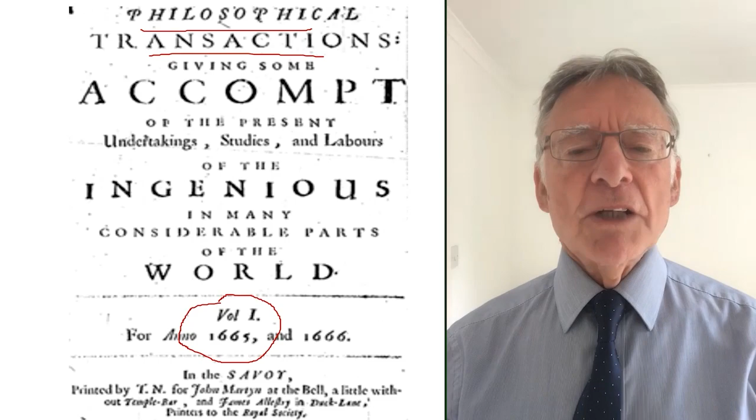Griffith's famous paper was printed in January 1921 in Phil Trans, originally being presented in October 1920. In it, Griffith produced his famous equation from the conservation of energy principle, which seemed crazy at that time. He showed that the stress at crack equilibrium, sigma, went down predictably as the crack length c went up. And this required the new idea of toughness, W, the fracture surface energy, which is the energy needed to separate atoms against the atomic attractions as the crack proceeds.

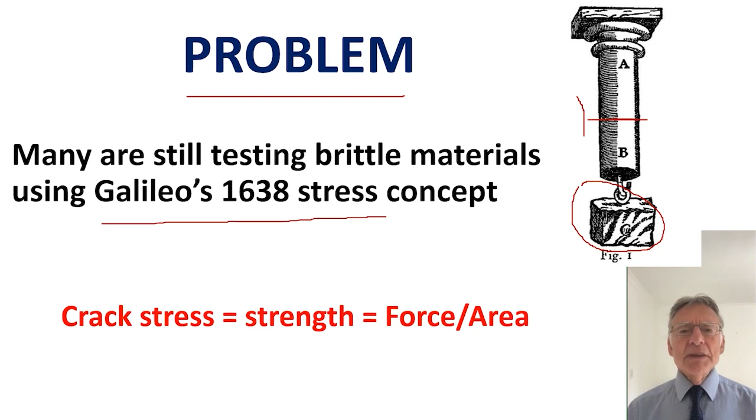Now the problem is that millions of engineers still use the old Galilean pressure theory of strength. What Galileo did was test a ceramic sample, applying a force with this weight and causing a crack here. He postulated that stress, this force divided by cross-section area, dictated cracking.

Today, we want to get it right once and for all. First, we want to celebrate Griffith's contribution. Then we want to present new results and theories like graphene reinforcing cement. And finally, we must reject the errors in fracture mechanics. It's a subject riddled with defects.

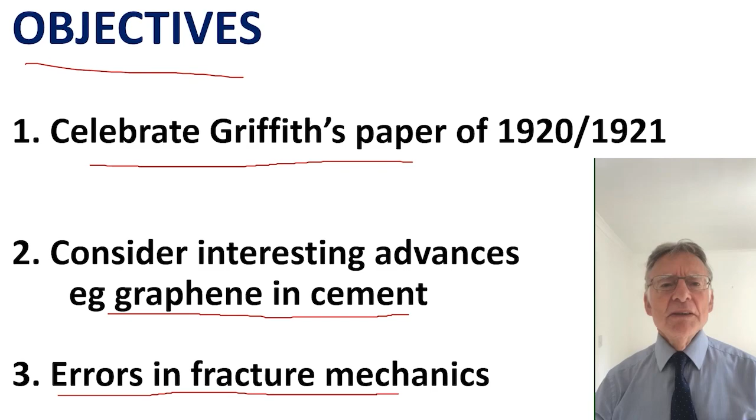The first speaker is Ange-Therese Akono from the United States to talk about graphene toughening cement. Siva Bohm has worked for many years on the manufacture of graphene. He takes a block of graphite and splits it into billions of atomic layers. Graphene is made by a cracking process.

Finally, Irene Fernandez-Villegas reports interesting results on welded thermoplastic composite sheets for aircraft. These sheets could crack along the weld to cause a disaster. A new approach to this problem is urgently needed because the ASTM standard does not mention Griffith.

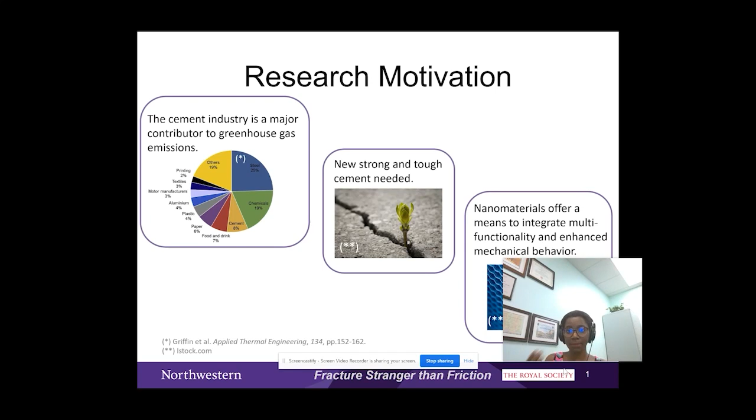There's a wide range of nanomaterials, and today I'm going to focus on 4 types of carbon-based nanomaterials: graphene nanoplatelets, helical carbon nanotubes, multi-wall carbon nanotubes, and carbon nanofibers.

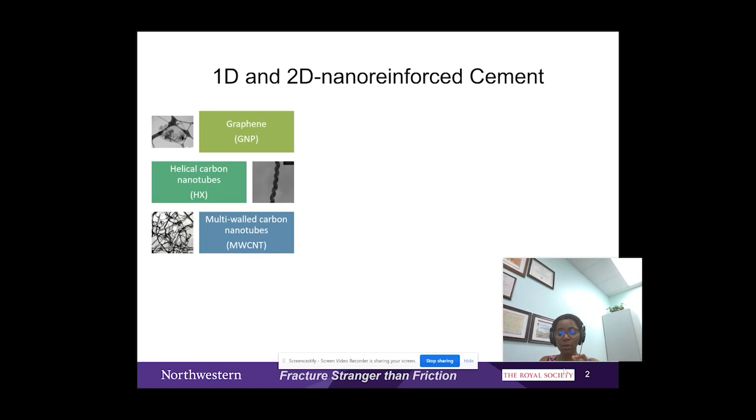In terms of dimension, the thickness of the graphene nanoplatelets is 8 to 15 nanometers. The diameter of the helical carbon nanotubes and multi-wall carbon nanotubes is 20 to 50 nanometers. The diameter of the carbon nanofibers is 150 nanometers.

In terms of length, the dimension of the graphene nanoplatelets is 1 to 2 microns. The length of the multi-wall carbon nanotubes and helical carbon nanotubes is around 50 micrometers, and the length of the carbon nanofibers is between 50 to 200 micrometers.

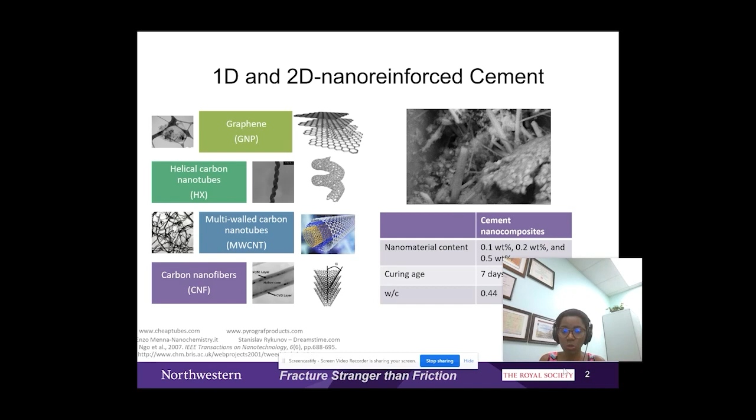Despite a lot of studies on this topic, some open questions involve the influence of carbon-based nanomaterials on the microstructure of cement and on the mechanical properties. In this talk, I'm going to use fracture toughness as a criterion to evaluate the mechanical performance of cement nanocomposites.

I will look at 3 types of reinforcement levels: 0.1%, 0.2%, and 0.5%. 0.1% and below has been extensively studied because it is easier to disperse nanomaterials at that level. 0.2% and 0.5% are interesting when we want to design sensors for structural health monitoring, for instance, but they are challenging in terms of synthesis, and I'm going to be tackling this.

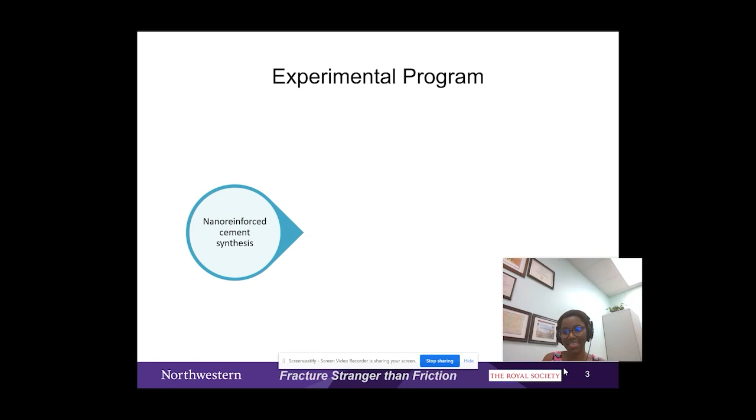In terms of experimental program, first I'm going to show how I actually yield my cement nanocomposites. Then I'm going to probe the microstructure and the mechanical properties. And finally, I'm going to conclude.

When it comes to synthesis, the important question is how do we achieve a uniform dispersion of the nanomaterials? How are we able to make sure that they don't become clustered within cement matrices? For this, I use a series of steps.

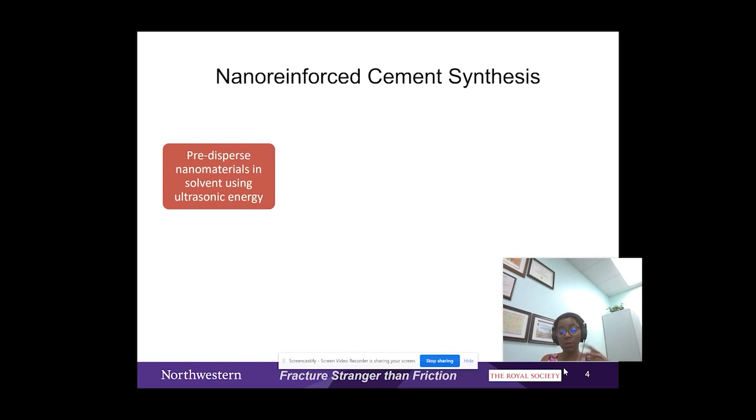First, I predisperse the nanomaterials using deionized water and ultrasonic energy. Then I mix that suspension using high speed and high shear, combining it with cement powder. Afterward, I cast it and use mechanical stirring during the first 24 hours with an orbital shaker, and then I cure for 6 days using deionized water.

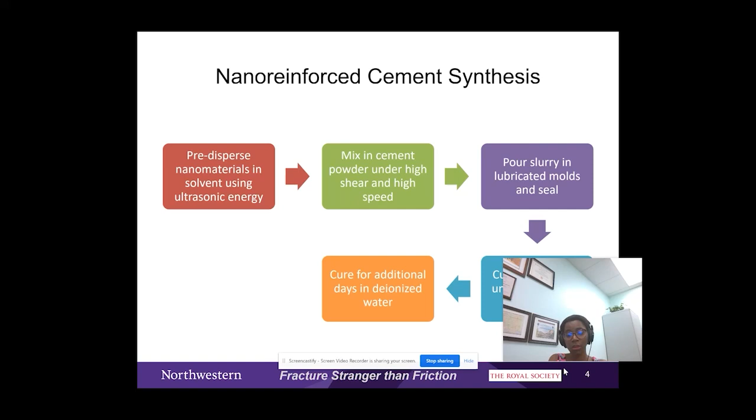Let's look at an example with carbon nanofiber reinforced cement. First I weigh the carbon nanofibers and the deionized water. Then I use ultrasonic energy to predisperse the carbon nanofiber. Now, that dispersion is not optimal.

This is why in the second step, I use high speed and high shear with cement powders. This time the unhydrated cement grains help me further disperse the carbon nanofibers. After pouring the slurry, I use an orbital shaker, and with mechanical stirring I keep breaking any potential clusters of carbon nanofibers so I obtain a uniform and well-mixed carbon nanofiber cement composite.

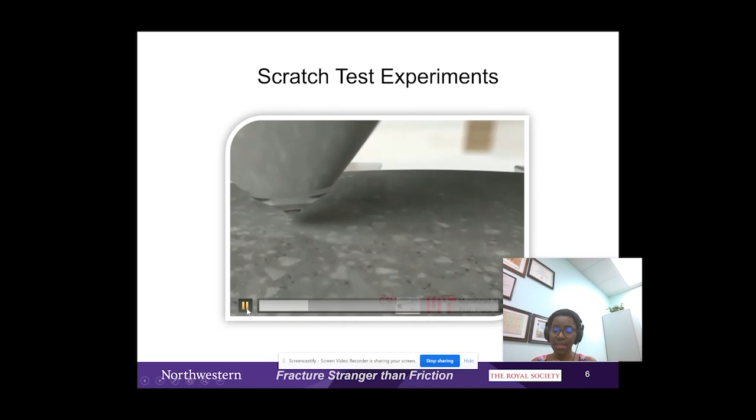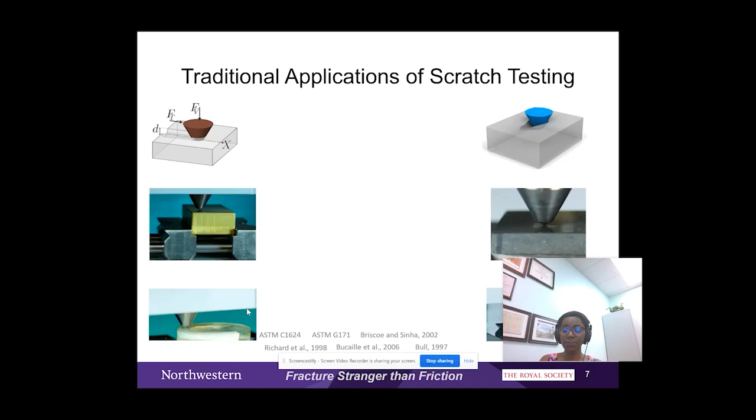I test the mechanical behavior using scratch test experiments. I use a Rockwell tip, a spheroconical probe, and I prescribe the vertical force while recording the horizontal force and penetration depth. Traditional applications of scratch testing include adhesion and cohesion of thin films and coatings, strength and hardness of ceramics, strength of rocks, wear of polymers, and damage of metals.

What I did was design a nonlinear fracture mechanics model to relate the forces to the geometry and to the fracture toughness in scratch testing. The final equation is given here, relating the horizontal force to the geometry and to the fracture toughness during scratch testing.

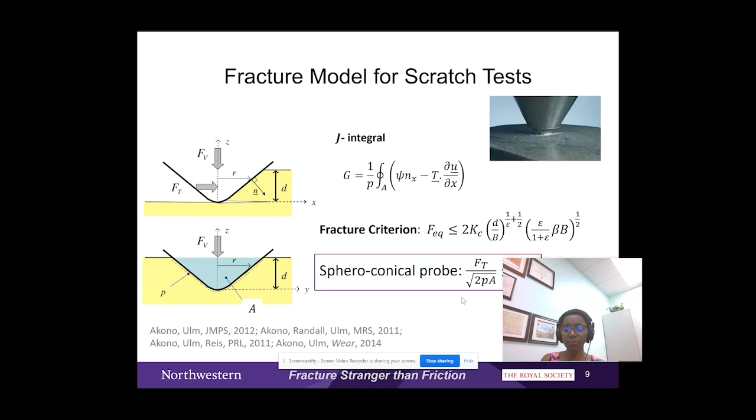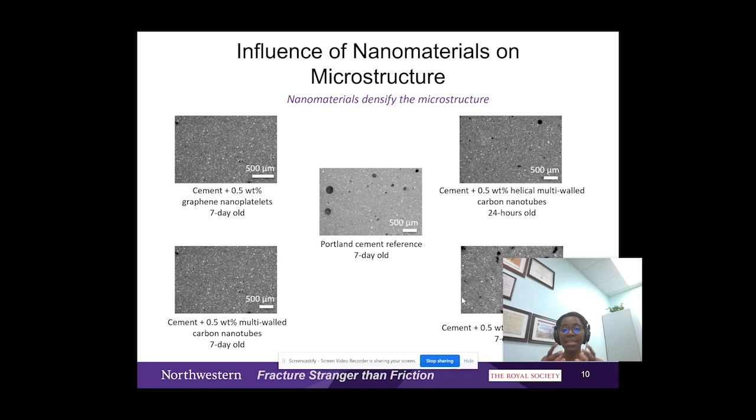So then I have a methodology, and let's look at the results. The first question I ask is how nanomaterials influence the microstructure when we have graphene nanoplatelet cement, helical multiwall carbon nanotube reinforcing cement, multiwall carbon nanotube, or carbon nanofibers. Overall, I observed a reduction in the microporosity, both in quantity and size of the pores, meaning nanomaterials tend to densify the microstructure of cement matrices.

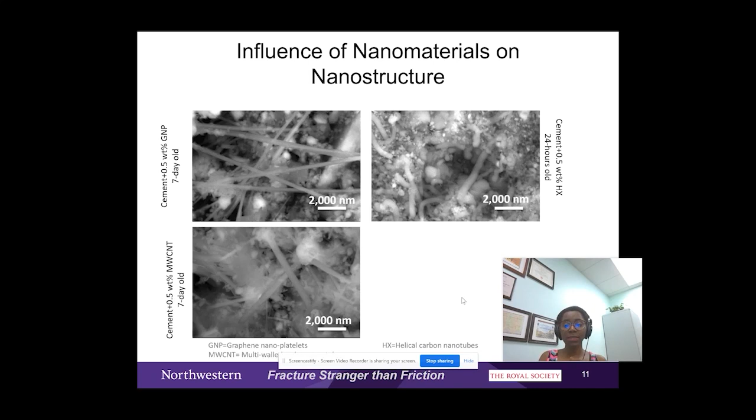Then I use high-resolution scanning electron microscopy to understand how nanomaterials interact with cement hydration products. I looked at graphene cement, helical carbon nanotube cement, multiwall carbon nanotube cement, and carbon nanofiber cement. What I saw is that nanomaterials tend to bridge nanoscale air voids and connect cement hydration products.

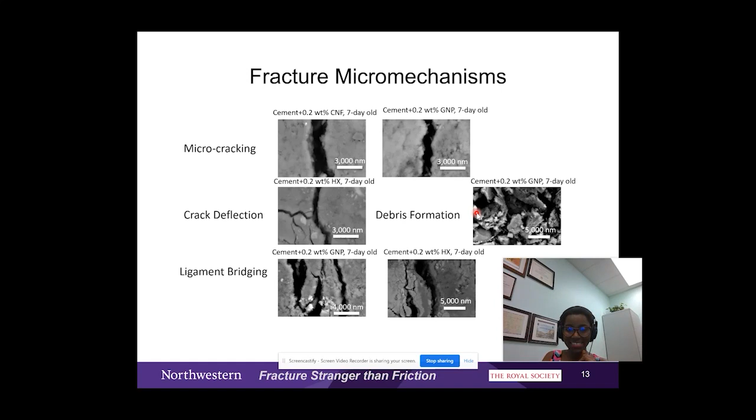I identified four types of fracture micromechanisms: microcracking, crack deflection, ligament bridging, and debris formation. We can even see the thickness, or width, of the crack during fracture, and it is between 1,000 to 2,000 nanometers.

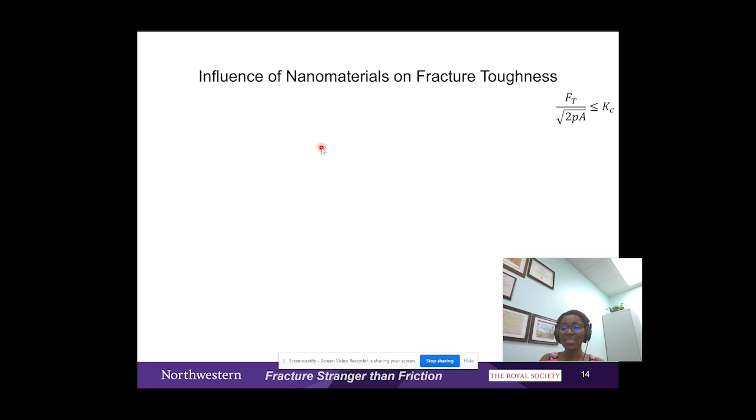Then I use my model to assess the influence of nanomaterials on the fracture toughness. According to my model, this quantity should be constant. What I saw is that for very low values of penetration depth, there's actually a mix of both ductile and brittle deformation taking place. However, at very large penetration depths, brittle failure becomes dominant, and in that range we can then measure the fracture toughness.

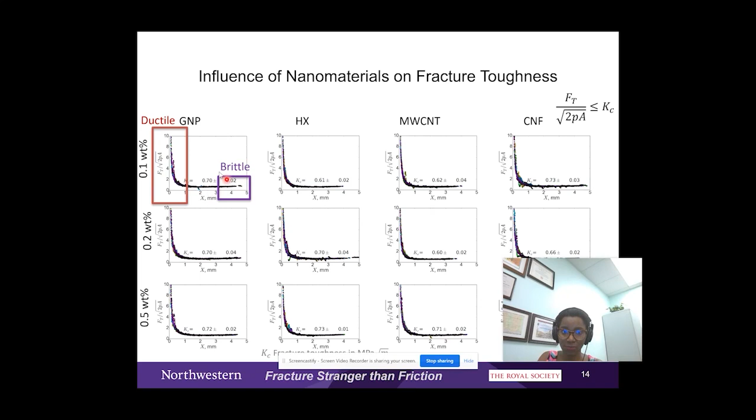Then I try to see the influence of both the type of nanomaterial and their volume fraction on the fracture toughness. For graphene nanoplatelets, I observe always an improvement in the fracture properties, in the fracture toughness, when we add graphene nanoplatelets. Similarly, for carbon nanofibers, there's always an improvement. However, in the case of helical carbon nanotube and multiwall carbon nanotube, there are some volume fractions where we observe a slight decrease, a really small decrease, and that suggests there's some room to optimize our dispersion process.

One thing that is very remarkable is that at 0.5%, for all four types of carbon-based nanomaterial, we have a 10% increase in the fracture toughness. This means that the procedure I presented is really important and enables us to significantly improve the fracture toughness of cement nanocomposites.

In conclusion, I've shown that nanomaterials yield a decrease in the microporosity and in the size of micropores within Portland cement. I've shown that nanomaterials bridge nanoscale air voids. I've shown that scratch tests can be used to probe the fracture toughness of Portland cement. And in the case of cement reinforced with 0.5% of nanomaterials, we see an improvement in the fracture toughness by up to 10%. Thank you very much.

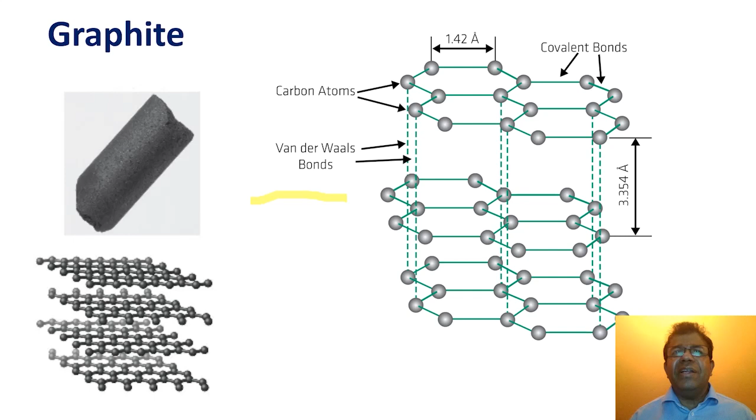The delocalized electrons on a single layer of graphene make it even more conductive. Graphene production from graphite via the top-down route has many unique advantages and is based on the one-step physical transformation of graphite into graphene. However, pristine graphene production has been pursued with difficulties, either in production rate or in the number of layers present in each graphene platelet.

Liquid phase exfoliation from graphite to graphene requires input energy to overcome forces between the layers. This required energy is provided by various means such as sonication, electrochemical energy, mechanical energy, or high pressure, to break existing interlayer interactions.

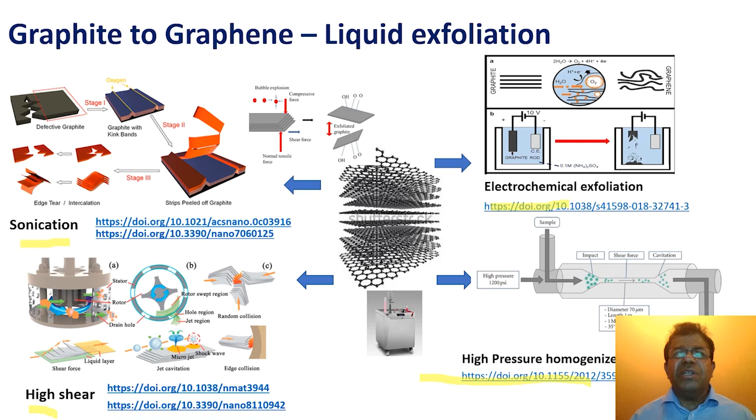Besides, many molecules such as surfactant molecules and polymer compounds are used as exfoliation agents to generate new forces such as pi-pi conjugation, hydrophobic force, and Coulomb attraction, matching the surface energy of the graphene layers to that of the exfoliation media. The underlying scientific principle is similar to Griffith's theory of crack propagation: reduction in potential energy should be greater than or equal to the increased surface energy due to the creation of a new free surface.

The excess energy exerted by the chosen exfoliation technique can also fragment large graphite particles or graphene layers into smaller ones.

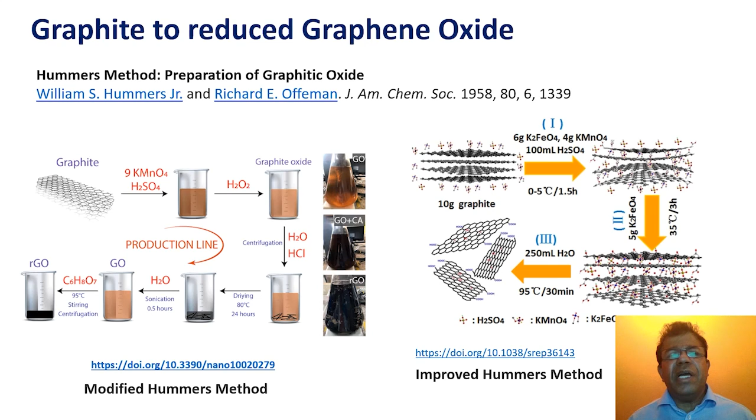Raman spectroscopy is a useful technique for characterizing sp2 and sp3 hybridized carbon atoms, including graphite, graphene, and other carbon allotropes. The 2D band is a second order two-phonon process and exhibits a frequency dependence on the excitation laser energy. The 2D band can be used to determine the number of layers of graphene.

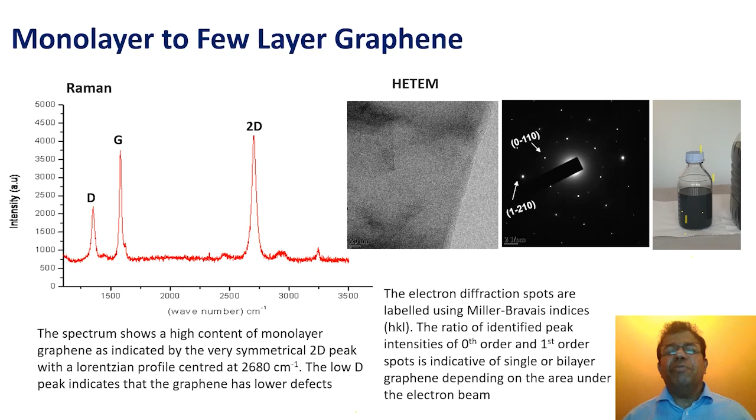Graphene-enhanced lithium-ion batteries show incredible characteristics such as long lifespan, high capacity, faster charging time, and lightness. Fuel cells are considered the 21st century technology for the production of electric energy. This is due to their high efficiency, low emission, safety, and silence. New catalysts can increase the conversion efficiency of fuels, increase durability, and decrease cost.

Anti-corrosion coatings with graphene and reduced graphene oxide nanoplatelets have been evaluated and are promising for protective coatings. Graphene is called the wonder material or ultimate additive for a reason. There is much industrial research which is not yet published, but may change the world tomorrow. Thank you for your attention.

Thanks, Siva. Your exfoliation methods are really fascinating. One question that's come in is from Fyodor Borovich. Carbon nanotubes and graphene are rather inert. He points out that they usually do not create chemical bonds with surrounding materials. How will you resolve this problem?

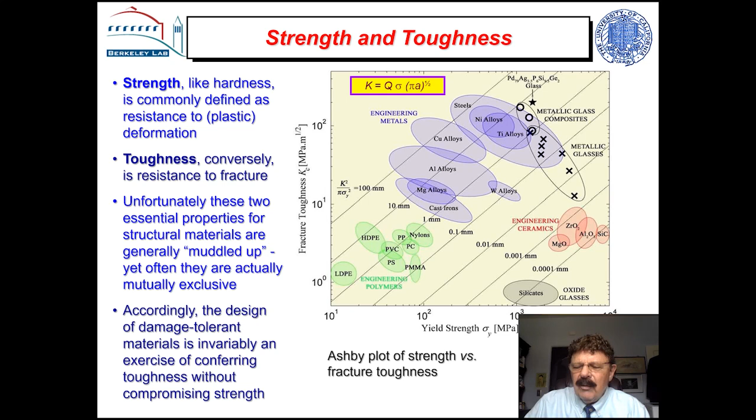Now, why is this? Well, toughness is often a mutual competition itself. Toughness is resistance to damage in the materials, and that's what I call intrinsic toughening. This takes place generally ahead of the crack tip. Damage is in the form of breaking particles, cracking the matrix, causing decohesion, and it's generally resisted by plastic deformation or whatever form of inelastic deformation you have. This is the main source of toughness in metals, and it occurs ahead of the crack tip.

But you can't use that very readily for ceramics. Ceramics tend to be toughened by a totally different mechanism, which involves shielding the crack tip from the applied driving forces. These mechanisms operate at and generally behind the crack tip. They're associated with bridging, say, fibers or grains that would carry load that would otherwise be used to propagate the crack. There's a grain bridging zone in a ceramic, silicon carbide. These mechanisms operate basically at multiple length scales, whereas plasticity is generally generated at the nanoscale.

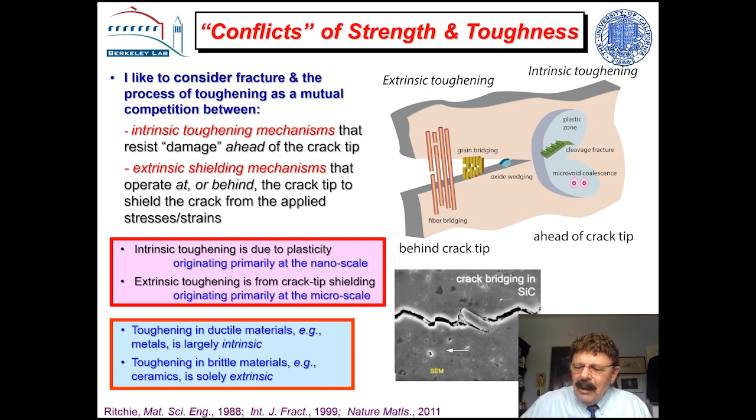So the intrinsic mechanisms occur ahead of the crack tip for ductile materials, and the extrinsic ones behind the crack tip, primarily for brittle materials. But biological materials seem to be able to combine both these mechanisms quite readily, and they do that by having multiple length scales in their microstructures. This is bone. It has characteristic dimensions at the nanoscale, twisted peptide chains, mineralized collagen fibrils, all the way up to the osteonal structure and the bone itself. So if you look at the mechanisms of toughening in bone, they combine both intrinsic and extrinsic.

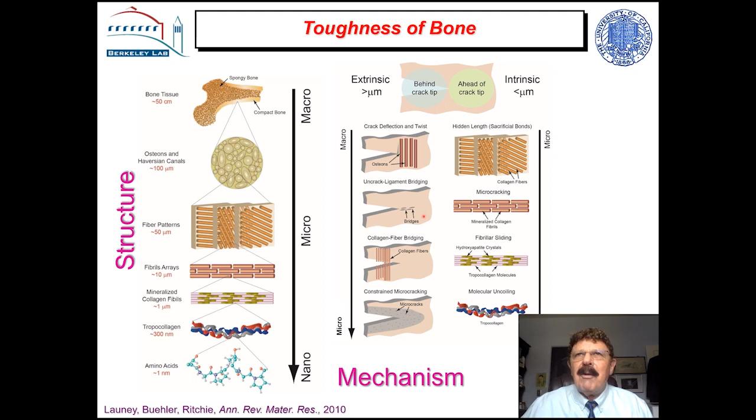At the small scales, for example below a micron, ahead of the crack tip, you see intrinsic toughening from plasticity. Plasticity in bone is generally many mechanisms, but generally it's the stretching of the collagen fibrils and then them sliding apart - that's fibrillar sliding. Anything that inhibits that will tend to inhibit plasticity. If you look above a micron, behind the crack tip, you see all the extrinsic mechanisms that you might see in a ceramic: microcracking, bridging by collagen fibrils, little regions between the microcracks that act as bridges, and deflection at the collagen fibrils. I have a few images of this from tomography.

Now, how does that work? Well, it consists of a tangled mass of collagen. These collagen fibers are very twisted and curved. And what happens when you put a load on skin? These collagen fibrils tend to straighten, and then they tend to rotate to carry more of the load. They get into this sort of aligned situation, much like a polymer might, and then they stretch themselves, they separate and delaminate, and they finally fail. So you start off with a tangled mass of curvy collagen, and you end up with these aligned ones, which are really very effective in absorbing energy.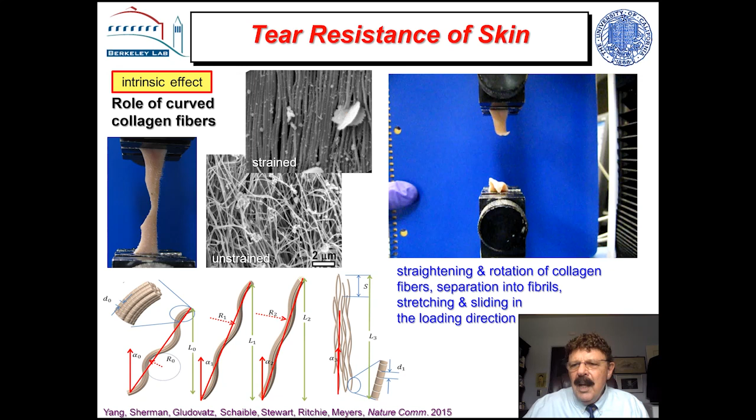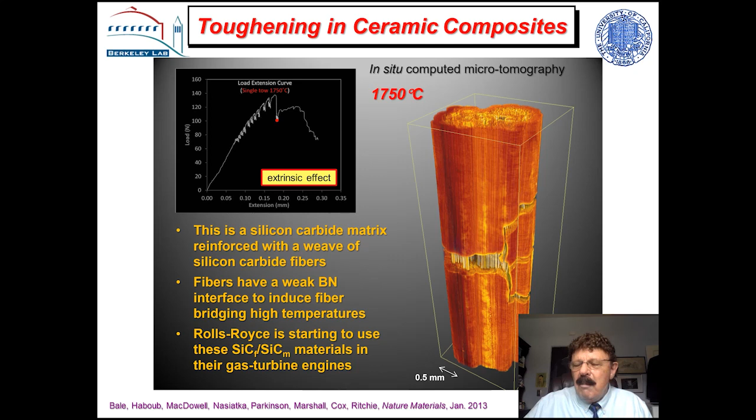These are very important. To enable the crack to be bridged by them, you have to have a weak interface, and they're coated by boron nitride to remain such that they can slide and generate bridging.

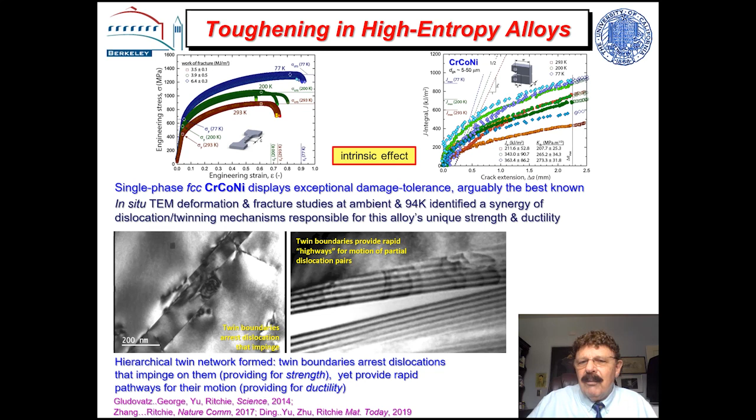Let me conclude by saying I've looked at how metals are toughened intrinsically, how ductile materials are toughened intrinsically. Brittle materials like ceramics are toughened extrinsically. The latter is associated with shielding behind the crack tip primarily, but the intrinsic ones are associated with plasticity ahead of the crack tip. But biological materials have this interesting function that they have multiple length scales. These different mechanisms are formed at different length scales, and so biological materials tend to be able to generate both intrinsic and extrinsic toughness, which gives them their remarkable properties.

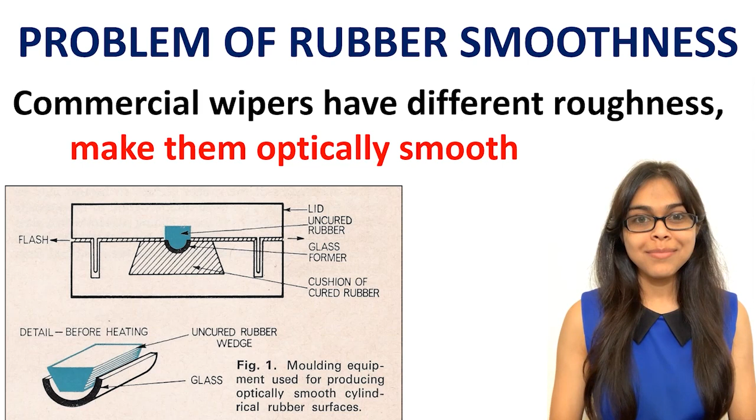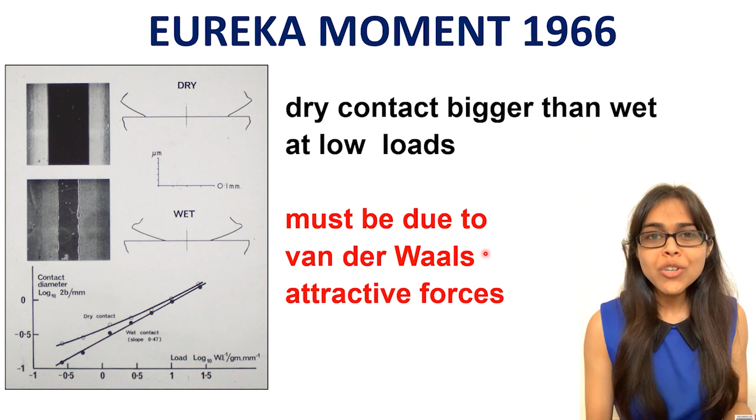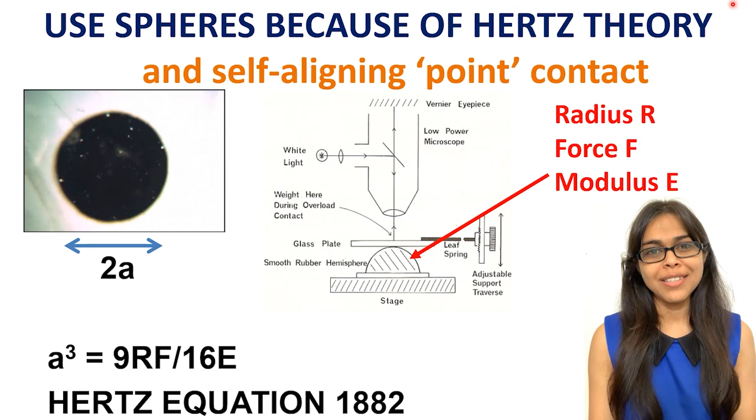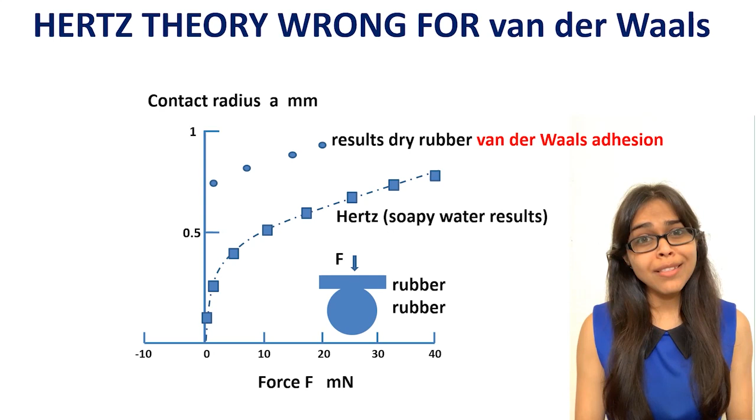Ken Johnson was the brilliant stress analysis engineer who had obtained the stress-field solution much earlier, by adding two well-known stress distributions in 1958. Sadly, he died in 2015, famous for his contact equations and his book on contact mechanics. Without Ken, it would not have been possible to explain this adhesion crack.

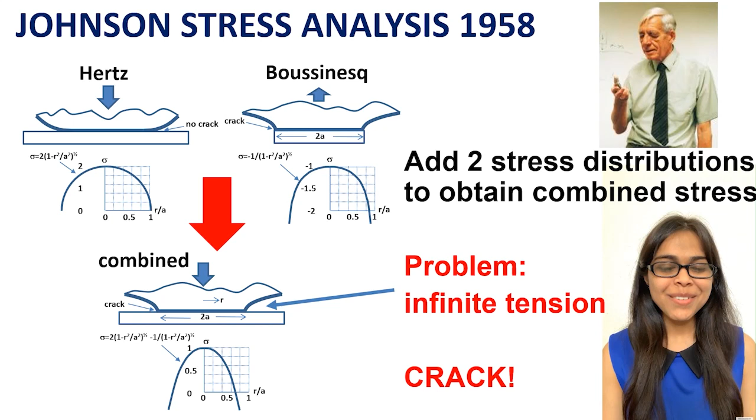It was 1970, 12 years later, when Kendall realized that it was necessary to apply Griffith's energy balance. Many stress experts still think that stress causes failure. No, it is the conservation of energy that prevails.

Every day, this paper is cited by international research groups working in many different fields, from accretion of cosmic dust to handling powders in the chemical industry, to virus nanoparticle adhesion, to the design of sneakers for athletes. Interest was slow at first during the 1970s to 1980s, but then accelerated rapidly.

In conclusion, the Hertz equation of contact needs more terms when van der Waals attractions cause smooth surfaces to stick together. There is no crack in the Hertz theory, but there is a crack in the Boussinesq solution, which must be added to account for the van der Waals attractions.

This story shows that stress analysis in itself cannot give the condition for cracking. Stress theoretically goes to infinity at the crack tip. The stress distribution must be used to work out the energy balance argument that Griffith invented in 1920. Then the new JKR equation emerges, fitting the experimental results for equilibrium. The main message is that stress itself does not define crack equilibrium. Energy does. Finally, congratulations to Alan Roberts on the wonderful invention and discovery. Thank you very much indeed.

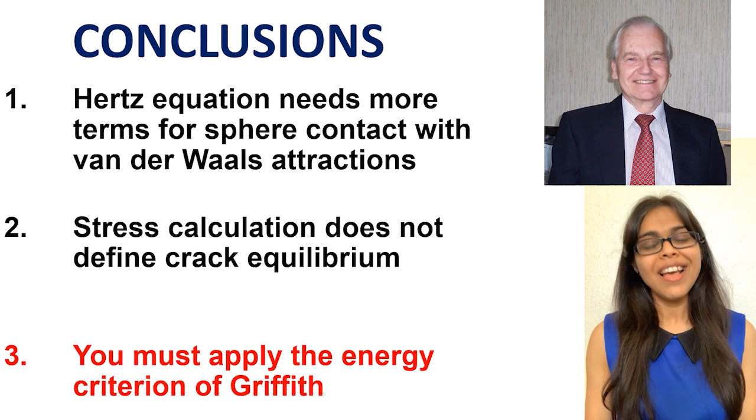Thank you. An excellent talk. Thank you very much indeed for giving it. Now we move on to Kaan.

My name's Kendall, and I've been locked down in summer, so I did a project on calculations of cracking in this compact disc test sample. The diameter is D and edge crack is length C. F is the applied force.

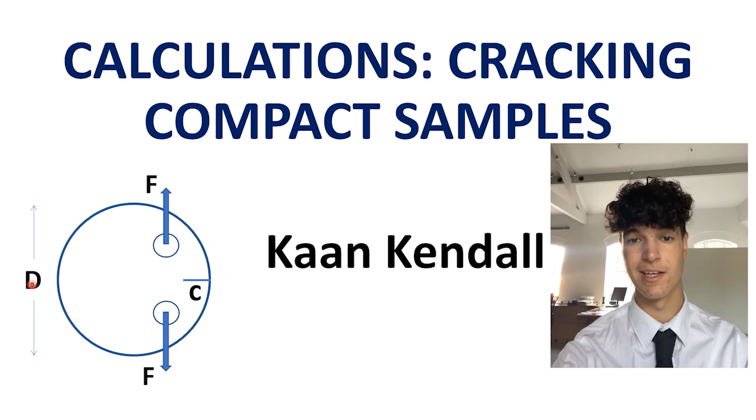The Griffith equation had three major problems. First, it assumed an infinite sample. Then, it had a central crack. Third, it assumed uniform tensile stress, which is difficult experimentally. Amazingly, it took more than 50 years to obtain the edge crack equation here. This requires 11% less force for fractures than Griffith's, so it's more dangerous.

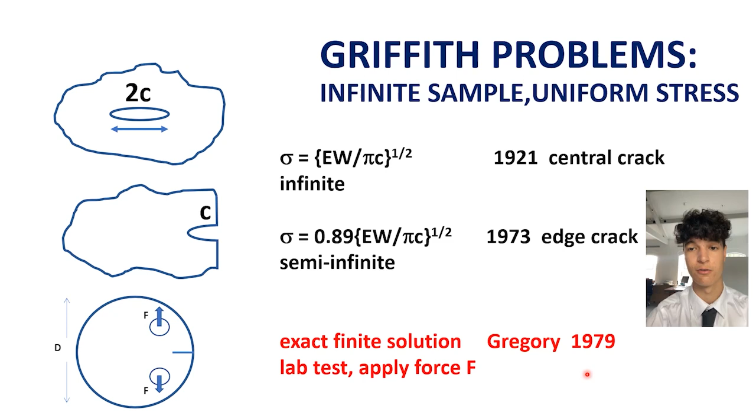The nominal strength is F over BD, and I've been calculating the strength for perspex discs, which are known to crack very controllably, so we can test this experimentally later. First, I calculated the crack equilibrium force for axial loading. The force F is applied along the diameter.

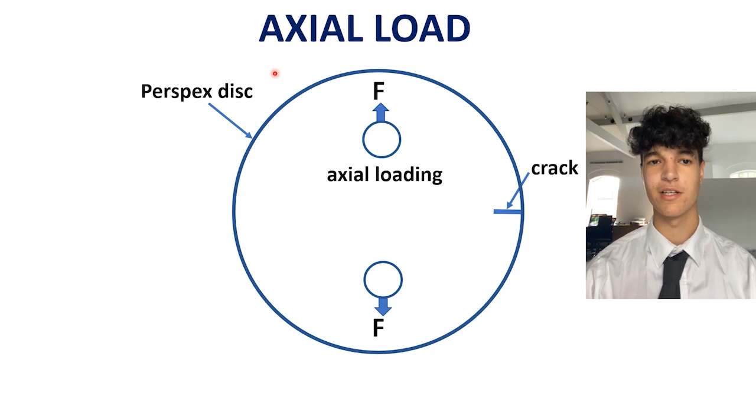The Griffith curve does not fit the facts, and the edge crack solution also does not fit. Here is the nominal strength F over BD, and here is the crack length. Meanwhile, the Galileo idea that force is proportional to the area is totally wrong. The Gregory strength goes to 0 when the crack has crossed the disc, which makes sense.

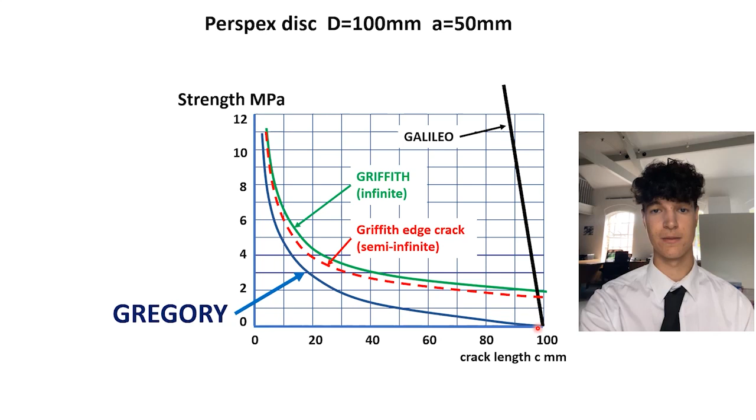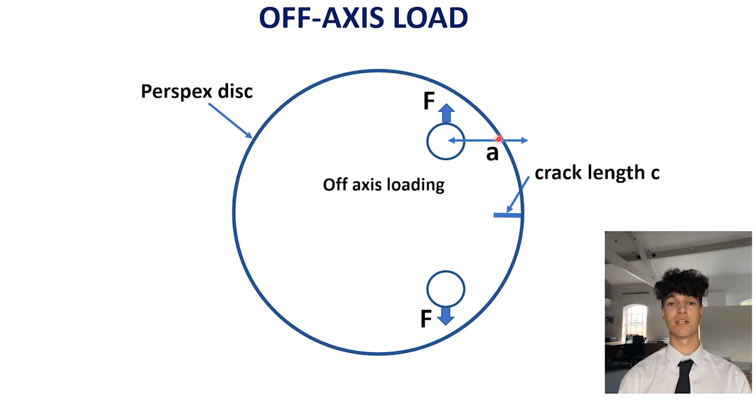The most interesting result is for off-axis loading. Here, we had to take into account the distance A, the distance of the force application from the edge of the disc. This calculation shows very interesting new behaviour.

This gives a size effect in which the disc gets weaker as it gets bigger, using equal crack lengths. But such size effects exist in bending cracks, compressive cracks, and adhesive joint cracks.

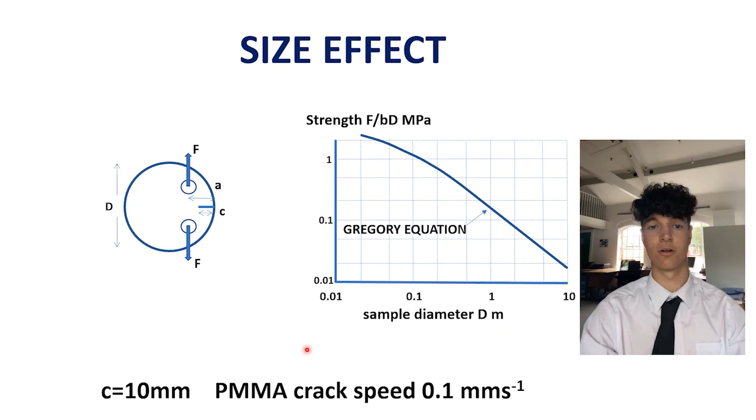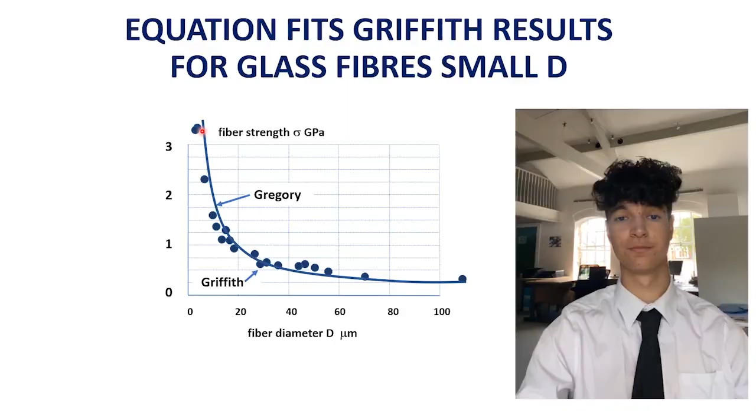Moreover, the Gregory curve fits Griffith's original results on strength of fine glass fibres. Griffith, in 1920, melted glass and pulled it to form fine fibres of several diameters. He got results showing fine fibres were stronger, but could not explain it with his cracking equation on infinite sheets under uniform tension. In conclusion, these calculations show that Gregory's equation is more interesting than previously thought.

It beats Griffith's because it uses a finite sample and uniform stress isn't needed. The actual loading gives a result like Griffith's, but better, because the force must go to 0 when the crack reaches the end of the disc diameter. Off-axis loads introduce bending, which gives a size effect. The disc gets weaker when it is bigger. Remarkably, the equation even fits Griffith's original 1920 results on glass fibres.

Fine fibres are stronger. Now, I want to go to the lab and get experimental results. Thank you for your attention.

Thank you very much, Khan. Extremely well presented, very clear, and your calculations are really interesting. I guess the basic question is, what calculation method did you use, please, for getting your results? Excel spreadsheet, Mathematica, and maybe you could add a comment on that, please.

Yeah, so I used Excel, and also a graph plotting program, so I could look at the different equations.

And when you get to the lab, when you observe these cracks in polymethyl methacrylate, better known as perspex or plexiglass, how are you going to measure the crack length? Have you got some techniques in mind there, please?

Well, you can draw a line from where the crack starts, then move the crack until it finishes, and draw another line and measure the length there.

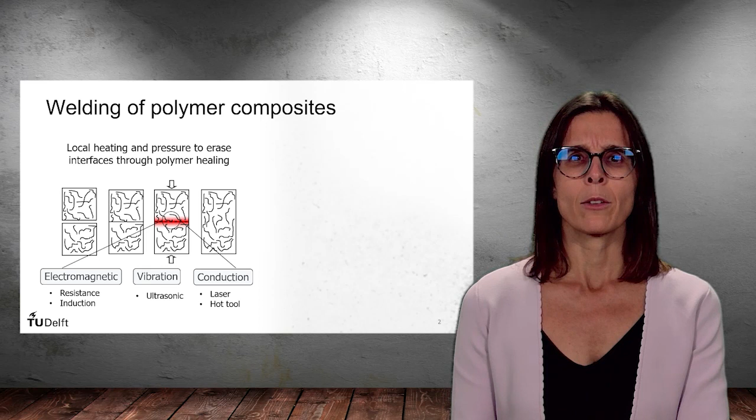Different welding techniques are often classified based on the physical phenomenon by which heat is generated at the welding interface. Hence we have electromagnetic technologies such as resistance or induction welding, vibration technologies such as ultrasonic welding, and conduction technologies such as hot tool or laser welding, to name a few. Welding is most commonly applied to thermoplastic composites, but as shown by recent research, it can be used to weld thermoset composites as well.

In composite welding, we often use single lap shear testing to quantify the quality of welded joints in order to develop welding processes or to compare different welding approaches. Why single lap shear testing? Well, single lap coupons are easy to manufacture and to test. Moreover, the test provides information about shear behavior, which is especially relevant for bonded joints.

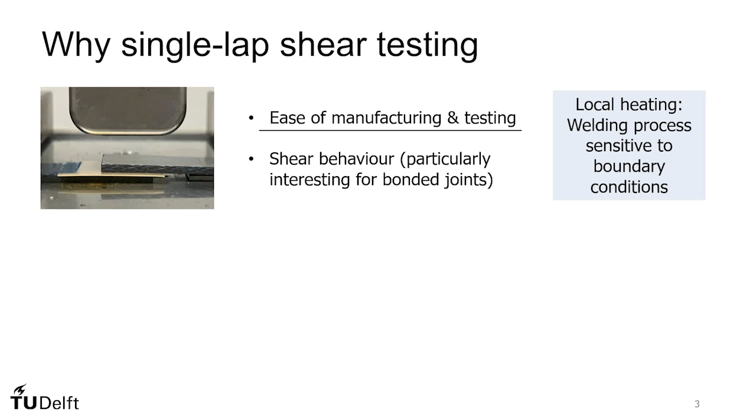Particularly, the ease of manufacturing plays a big role when it comes to welding, since owing to their local heat generation, welding processes are highly sensitive to heat transfer and hence boundary conditions.

Take for instance the case of a double lap welded joint. One way of producing it would be by welding a single lap joint first, and then welding a third adherend to it. However, if we consider the heat transfer problem, we see that the first and second welds have different boundary conditions. Hence we will most likely need different welding parameters to achieve the same weld quality in both cases. This is illustrated by these fracture surfaces that indicate quite different failure behavior when the same welding parameters were used to obtain the two welds in a double lap joint.

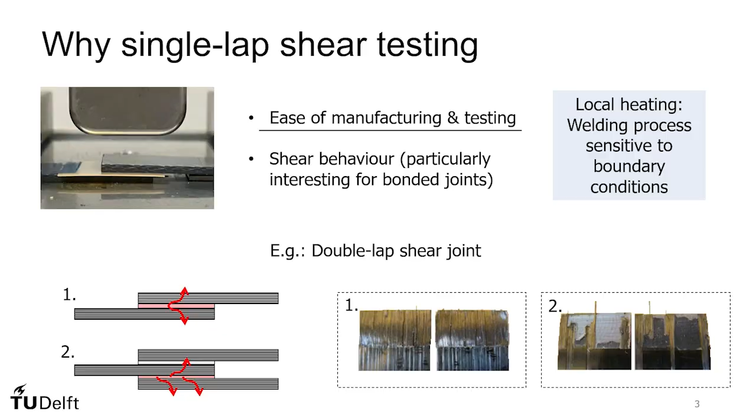We should, however, be aware that the single lap shear test has some particularities. Firstly, the joint is not subjected to pure shear, but to a combination of shear and peel stresses. Secondly, the stress distribution at the joint is not uniform, but features a so-called bathtub shape, with peak stresses at the edges of the overlap.

Finally, these peak stresses are sensitive to numerous factors such as bond line thickness, whether the adherends are tapered or not, the presence of fillets, or the stiffness ratio between bond line and adherends. Despite these particularities, the single lap shear test is commonly regarded as a useful tool for comparison and process development. Let's see how that works for composite welded joints.

First, an ambitious comparison: welded versus mechanically fastened joints. In this study, we followed a stepwise approach in which first we looked separately at the shear and peel behavior of the two types of joints. The welded joint consisted of a 10mm diameter ultrasonically welded spot, and the fastened joint of a single high-lock fastener. The shear performance of both types of joints was similar.

However, the peel load carrying capability of the welded joint was 5 to 6 times lower than that of the fastened joint. Based on these results, we expected the single lap shear strength of the welded joints to be significantly lower than that of the fastened joints.

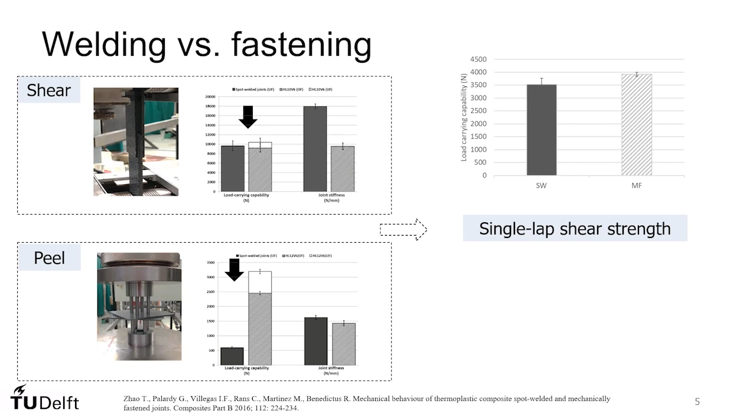But fortunately for us, that was not the case. Why? Well, if we go back to the shear tests, we see that the welded joints had a much higher stiffness. Consequently, secondary bending during single lap shear testing was lower, which resulted in lower peel and hence a more favorable stress scenario at each load level in the welded joints.

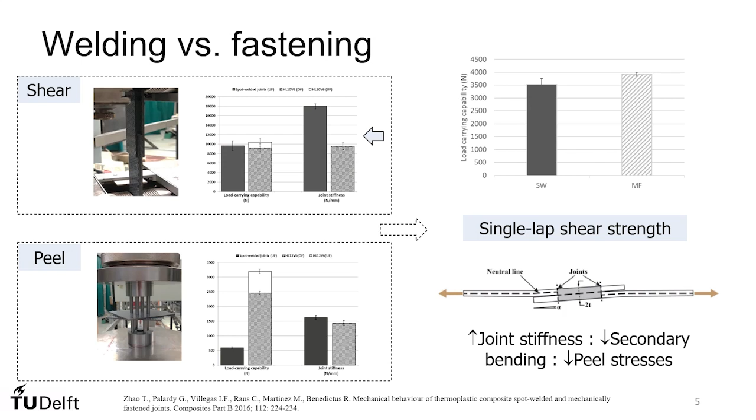Can we say this was a fair comparison? Let's look now at the comparison among different welding processes.

In this second study, we used single lap shear testing to compare ultrasonic, resistance, and induction welding. The tests indicated that induction and ultrasonic welds behaved similarly and were somewhat stronger than resistance welds under static loading. Additionally, there wasn't any significant difference in behavior under dynamic loading.

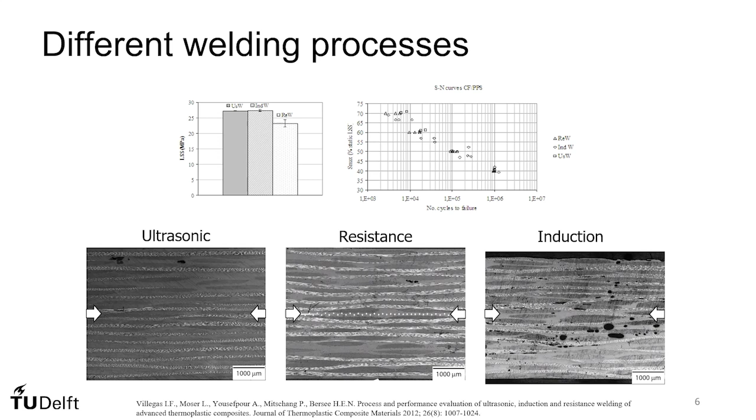However, by examining the cross-sections of the three types of joints, we saw, firstly, that in resistance welds, the weld line, indicated by the white arrows, was fundamentally different from the weld lines in induction and ultrasonic welding, in the sense that it contained an embedded resistive element responsible for heat generation, in this case a metal mesh.

Hence, the presence of the resistive element resulted in a different thickness and probably stiffness of the weld line in resistance welds. Secondly, the typical occurrence of through-the-thickness heating in induction welding, plus the application of the welding pressure, resulted in tapered adherends. From these two observations, one could imagine that at the same load level during the single lap shear test, the stresses developed in the ultrasonic, resistance, and induction welds were not the same.

So we come back to the same question: was this a fair comparison?

Finally, let's look at the role of single lap shear testing in the optimization of a welding process by investigating how changes in different process parameters affect the quality of the welded joints. In this particular graph, we see the single lap shear strength of ultrasonically welded joints obtained at different vibration times.

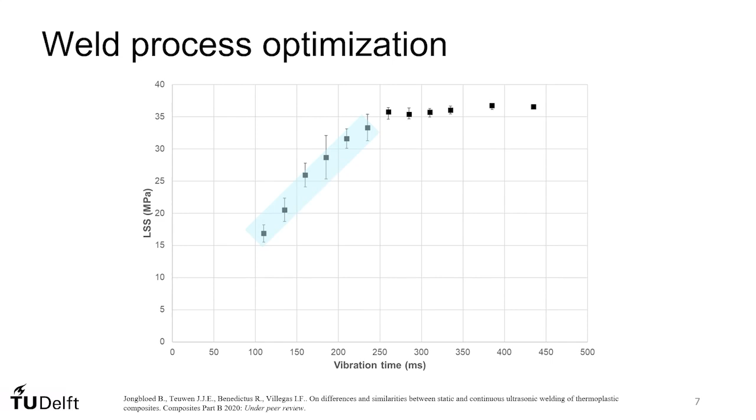Let's first focus on the first region of the graph, where the single lap shear strength increased with increased vibration time. If we look at the fracture surfaces of the joints welded in this region, we see that the welding process started at the edges of the overlap and progressed towards the center. Hence, as the vibration time increased, so did the amount of welded area and the single lap shear strength.

Based on this trend, one could expect to find no changes in the amount of welded area in the second region of the graph, where the single lap shear strength remained constant. However, the fracture surfaces showed otherwise, indicating that after a certain threshold, the single lap shear strength values did not allow us to discriminate anymore between partial and fully welded overlaps.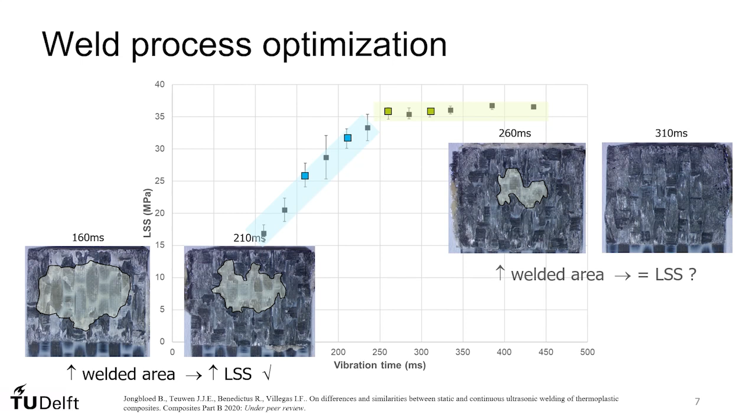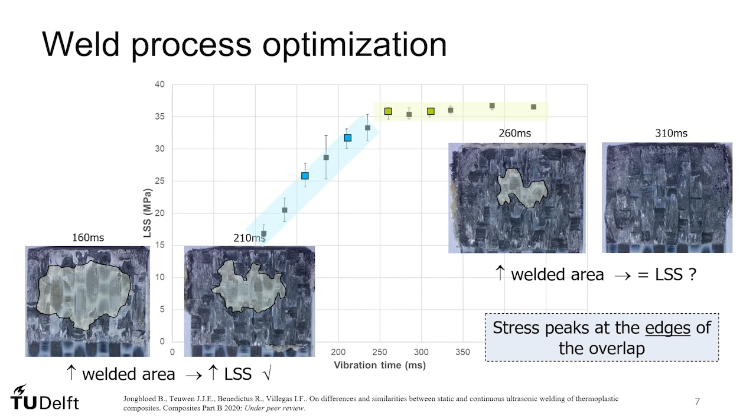We believe this is due to the stress distribution during the single lap shear test, in particular the fact that the stresses are much higher at the edges than anywhere else in the overlap. Therefore, the quality of the weld at the edges of the overlap can be expected to contribute more towards the final strength value than the quality of the weld in the center.

After all my years of experience working with polymer composite welded joints, I can conclude that the single lap shear test is a very valuable, easy-to-use tool to assess the quality of welded joints. However, in order to answer the research question at hand, one must consider how the specific characteristics of the welding process and those of the welded joints it creates interact with the particularities of the single lap shear test, and how that interaction ultimately affects the strength values one gets from the tests.

Thank you very much, Irene. An extremely interesting paper on the joining of polymer composites.

A question: the mechanism of adhesion by interdiffusion requires that a certain length of polymer chain from one side of the interface diffuses across the interface and penetrates into the polymer on the other side of the initial interface. Do you have any idea of the lengths of the polymer chains needed to interdiffuse in order to obtain a good level of toughness?

Well, I don't know exactly the length that needs to interdiffuse, but what I can tell you is that we have an upper limit for that. The thickness of the welded joint, the thickness of the weld line, is normally around 80 microns. So what I can say is that they won't interpenetrate more than that. That's all I can say.

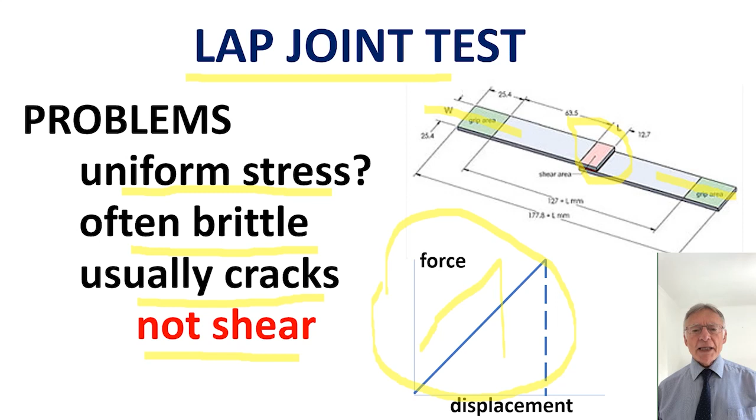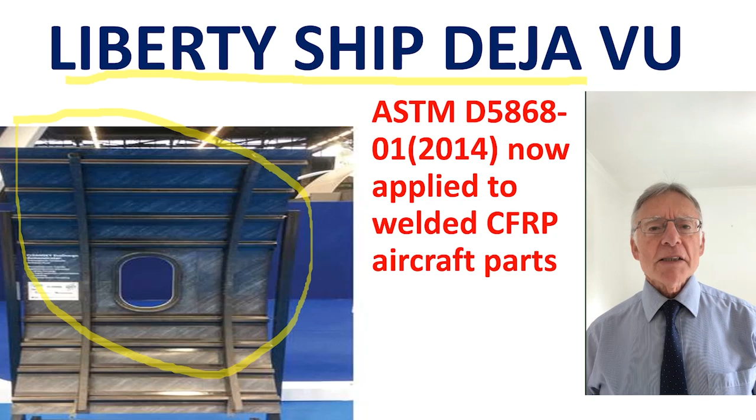Now that carbon fibre aircraft parts are being made by welding carbon fibre sheets, there's a danger that cracks can run through the welds at low energy, with disastrous effect. Another Liberty ship disaster may follow this ASTM standard.

There's a long history behind this lap joint crack test. Originally, it was described in Phil Trans during 1850 to understand how riveted iron railway bridges failed. William Fairbairn proved that the joint deformed like this by bending, then cracking the rivet.

In 1974, I showed with rubber strips that the joint does bend slightly and a low angle peel crack goes through the lap joint. It's definitely not shearing.

The stress analysis for the joint was done 82 years ago by Volkersen, showing very high stresses at the corners, as you'd expect. But why did Volkersen not apply Griffith's energy argument? It was 18 years after Griffith.

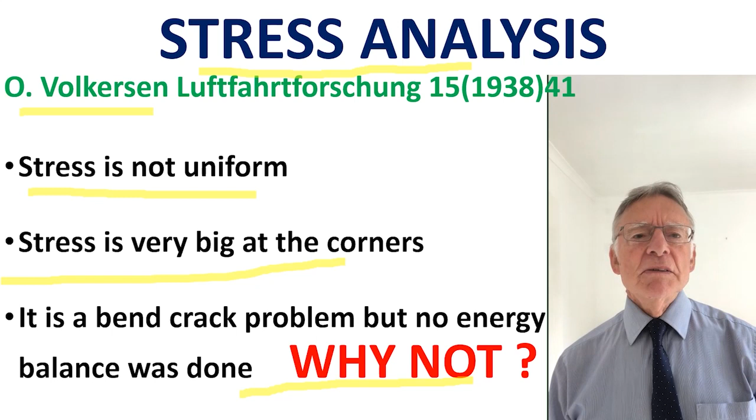Most engineers still wrongly believe that the strength argument applies. No, when cracking occurs, you must use the energy argument.

The energy analysis is easy if we consider a long half joint like this with one crack. The main energy is in the elastic stretched sheets. At the crack tip, the energy is constant as the crack runs along, and so it disappears.

It can't drive the crack. There is no stress intensity factor. The Griffith argument leads to this simple result, and the equation has the same dimensions as the Griffith equation, but completely different behaviour.

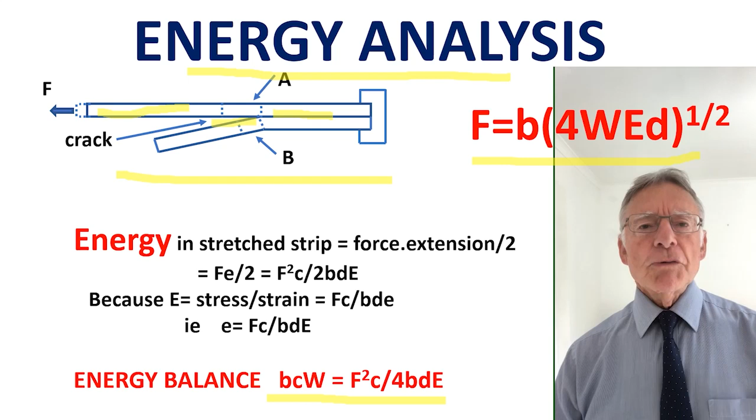The theory shows that it's not shear. Also, the crack tip does not drive the crack. It's not c to the minus a half. You may find it surprising: there is no stress intensity factor.

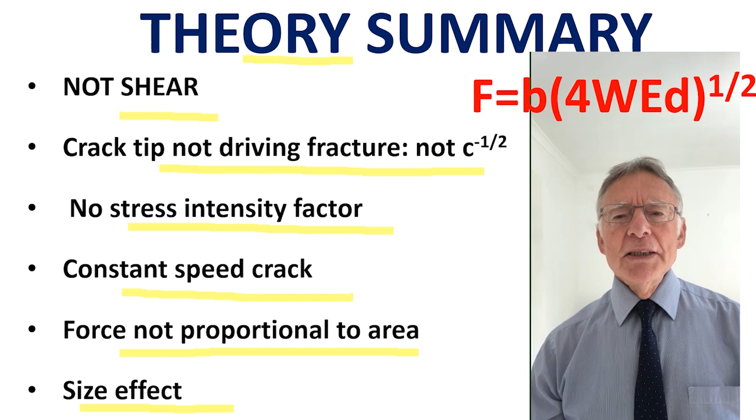The crack goes at constant speed, unlike the famous Griffith crack, which accelerates. Moreover, the force is not proportional to the joint area. The joint gets weaker as you scale up. So strength can be any number you want.

Experimentally, I tested this equation with rubber strips by doing a simple peel test to measure the work of fracture. I call this R here because it's not really equilibrium, so it's different from W, the equilibrium fracture energy. Naturally, this must depend strongly on crack speed, so you must control crack speed to get the right answers.

Then I plugged the value for fracture energy into the lap equation to compare with the results on lap joints, and it fitted. Because elastic modulus is a big number, it enters the equation, so force increases by a factor of 100 over simple peeling.

It is not just one ASTM standard that causes problems. All these ASTM documents talk about strength and shear. They're wrong. The description of the test as a shear strength test is not correct. The important parameter when it cracks is toughness.

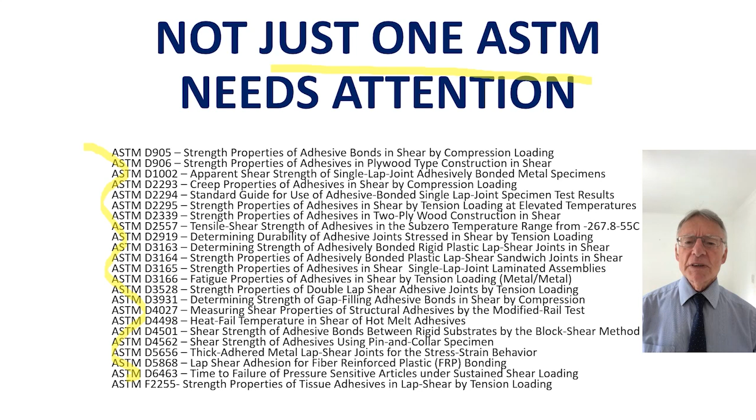We need to correct these errors in fracture mechanics. Lap joint strength does not exist because the fracture force is not proportional to the area. It's not shear, it's cracking. The crack speed is constant, there's no stress intensity factor. The strength depends on sample size. Let's correct these errors today.

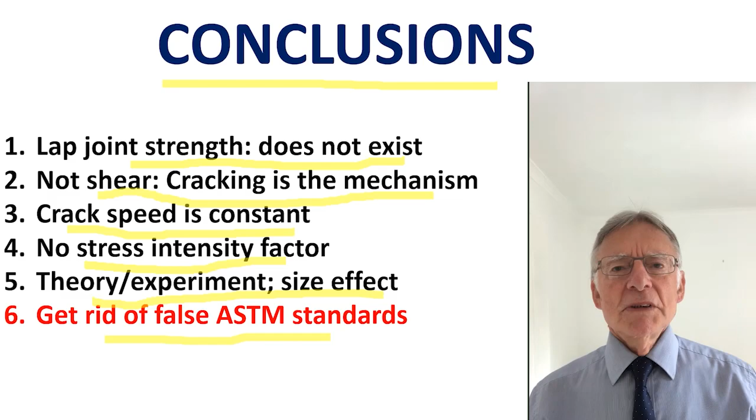Thank you very much, Kevin. Kevin and I have known each other 50 years this year, and I've always known that one of Kevin's real hates is the lap joint test. And actually, I fully agree with you, Kevin.

I think it's one of the very worst of the commonly used test methods. But an obvious question is, since the force to fracture the lap joint does not rise in proportion to the bonded overlap area, why has it taken so long to accept your fracture mechanics based ideas, especially by industry?

Yeah, it's a great question. I still don't understand it. Because when I first met you in the 1970s, you were talking about peeling and those sort of things. And that's how I started working on peeling at the British Railways, peeling dirt off British Railways rolling stock.

The fact is that if you take a sample like this, which is perspex—can you see this possibly? There's a perspex block, and on it we've got a strip of rubber, a bit like Alan Roberts rubber, which is smooth, and you then start peeling it off. I think you may be able to see that peeling.

Then you're applying a force, and it peels off. And then you begin to think, this force is being applied, but it's not connected with this big area here. So the force and the area simply, there's no connection. The force actually depends on the thickness of the strip.

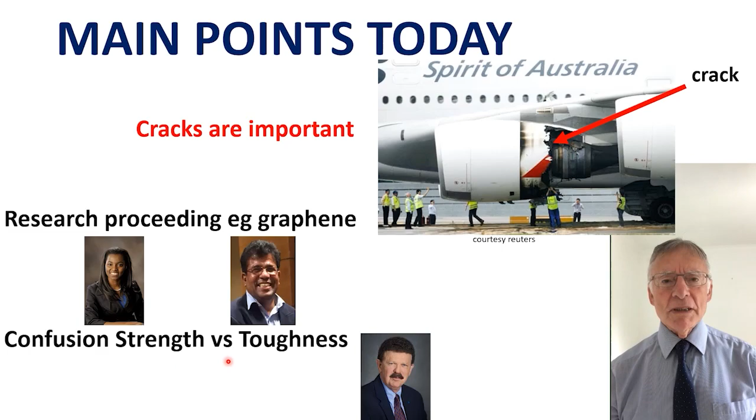But there is no doubt Griffith got it right with his conservation of energy theory of cracking. However, his famous equation for a stretched sheet is only a particular solution. It does not apply generally to many crack configurations. For example, the rubber sphere adhesion crack from Alan Roberts, or the disc compact test, is quite different. And also the lap joint test may look similar in dimensions, but is very different in behavior.

And we need to correct errors in fracture mechanics. First of all, there's a size effect, which is not mentioned in fracture mechanics textbooks. Also, stress intensity factor does not exist for many cracks, for example a lap joint crack or a peeling crack. And finally, energy conservation must be applied, and people have failed to do that in the past. The stress balance, although fascinating mathematically, is not sufficient.